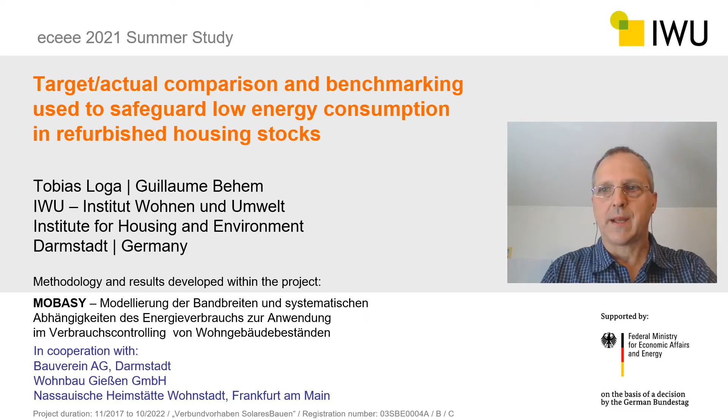So what are the challenges we are facing? Half of the 40 million homes in Germany are in multifamily houses, about a third of which is owned by housing companies. Most of these multifamily houses are heated by central heating systems operated by the housing companies. So when the housing companies get the energy bill, they just forward the bills to the tenants, who are of course supposed to pay them regardless of the energy standard of the building. It's just a transit item for the housing companies.

However, many housing companies put a lot of effort into energy refurbishment, driven by the challenges of the climate crisis and to improve living conditions for their tenants. However, most of them do not systematically track the applied measures and the energy savings. So the idea of the MOBASY project is to develop a concept for target-actual comparison and benchmarking, and to apply the concept in cooperation with housing companies.

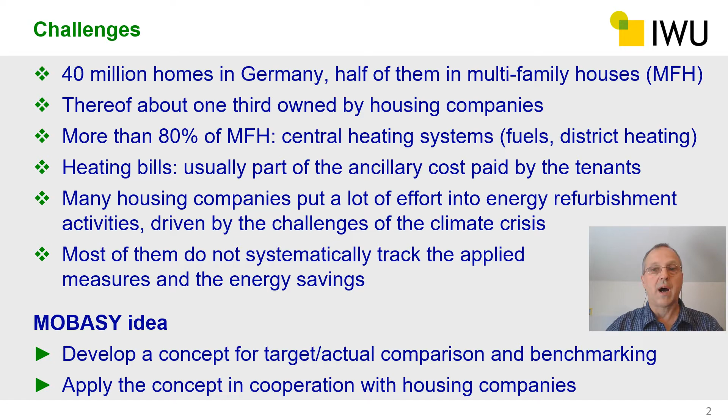The idea is to attach to processes which are already running in the housing companies and to just add elements which are able to collect and store information about the energy performance of the buildings.

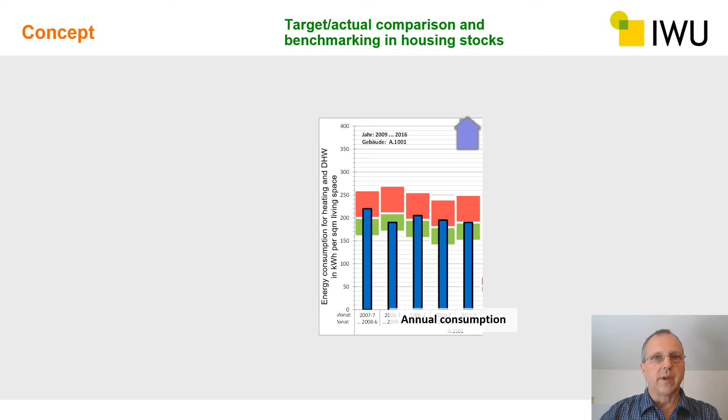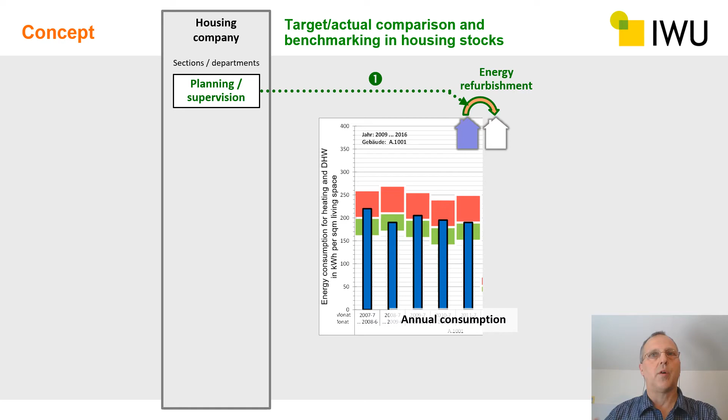So if we take an example building which is not yet refurbished, with an annual energy consumption of about 200 kilowatt hours per square meter per year, the housing company decides to make an energy refurbishment. The planning is carried out by the housing company itself or by commissioned architects or civil engineers. The new element is that we store specific information about the energy performance of the building—about the theoretical energy performance, about the thermal envelope, about the heating system—in a monitoring database. This enables us to determine the expectation range for the energy consumption.

Now the refurbishment has taken place, the energy consumption is on a new level, and the heat billing is performed as in the years before—this is as usual. Now the new element is that we store the information about the annual energy consumption also in the monitoring database and assign it to the information about the energy state of the building.

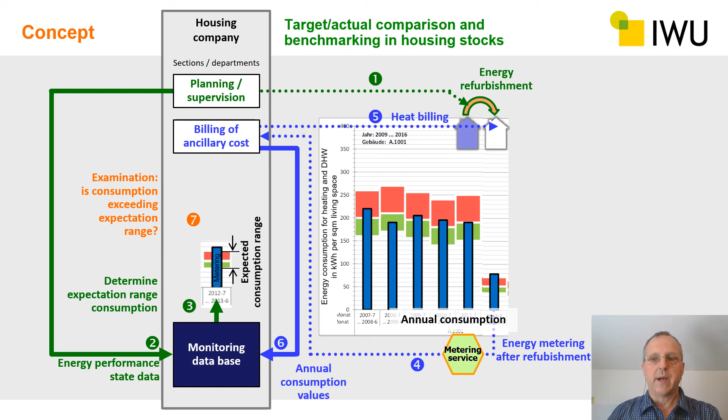So now we can compare the metering with the expected range of energy consumption. Usually there will be no problem and it will fit, but in some cases there may be an exceedance. In these cases we can have a closer look at the operating conditions of the building, maybe also at the user behavior. So we don't have to do this for all the buildings, but only for those where an exceedance has been found.

And of course we can continue this process, because the information is stored about the state of the building. We can continue this process in the building stock and also extend it to other buildings which are refurbished.

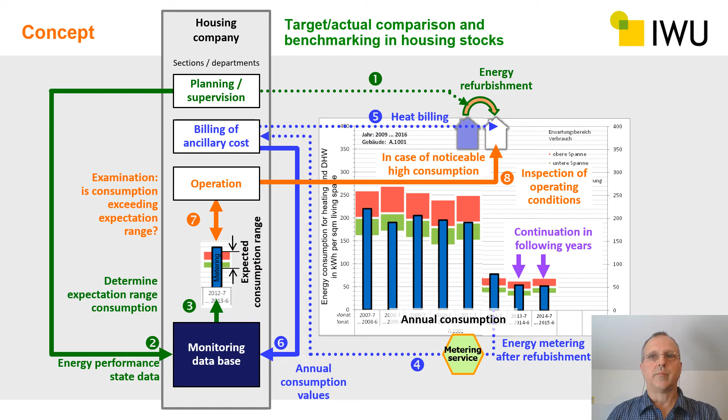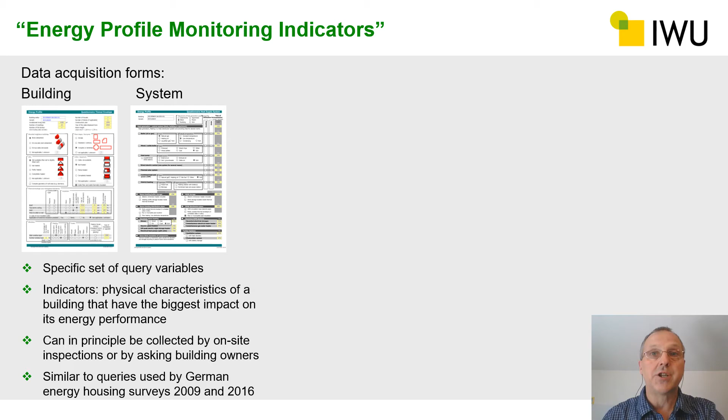For the collection of information about the energy performance characteristics of the buildings, energy profile monitoring indicators are used, which are a specific set of query variables and indicators on the physical characteristics of a building that have the biggest impact on its energy performance. These indicators can in principle be collected by on-site inspections or by asking building owners, and that's also the reason why these indicators have been used in German energy housing surveys in the years 2009 and 2016.

Let's get a closer look at the form for the building. At the top we have general information: living space, number of stories. Then we get information about the number of attached buildings, geometrical information, and the state of the heating situation in the attic and in the basement. We also get information about insulation upgrade, thickness of insulation, area fraction, year of installation, and about the window types—the number of panes, low-e coating information, frames, and year of installation of the windows.

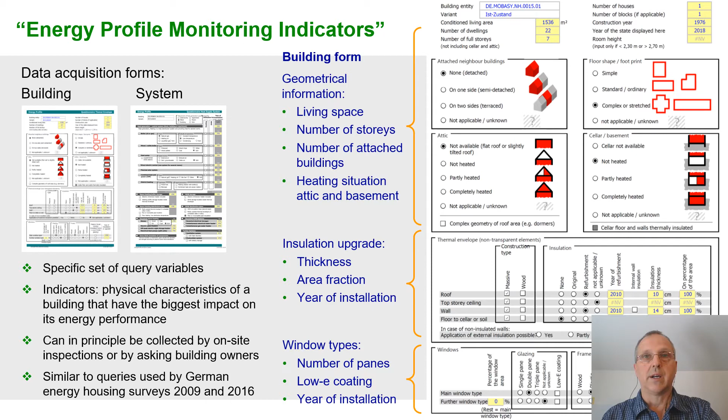Now that we have gathered the energy profile indicators for all the buildings in the database, a transformation is done to input variables for a physical model. The input variables consist of calculation values and an uncertainty range. Since we are dealing with existing buildings, not all information is available, so we make a treatment of missing information. In these cases where something is missing, we use averages valid for the total building stock, and at the same time we increase the uncertainty, the typical range of this variable.

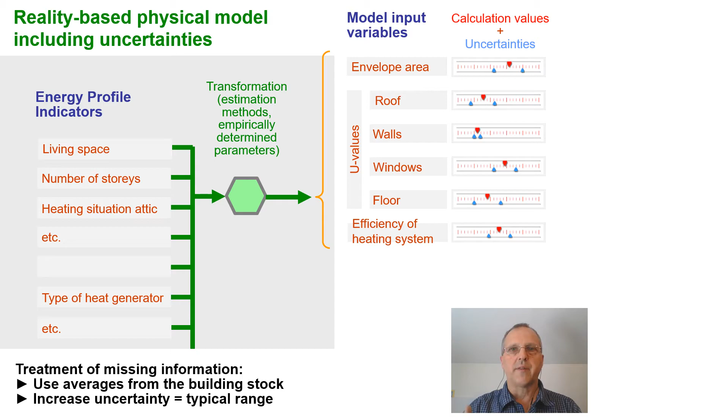This is also done for the boundary conditions. Here too we have calculation values and an uncertainty range for the user behavior and for the climatic data. Now we can perform an energy balance calculation with a physical model and get one value for the energy use of the building. We do a second calculation where we take all these uncertainties of the input parameters and calculate the resulting uncertainty of the energy use. So we get a value for the energy use and we get an uncertainty of this value from our calculation.

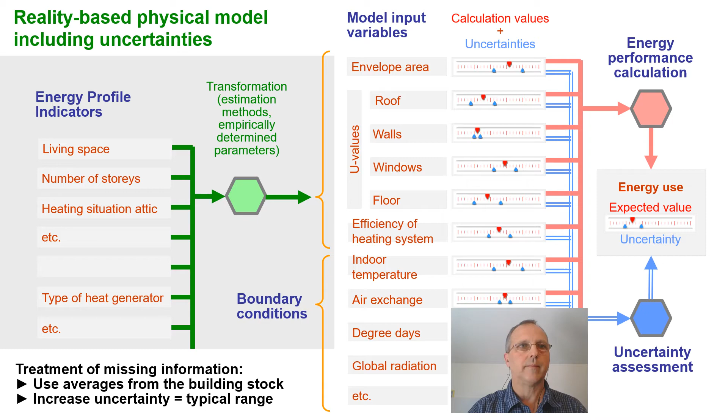Now we are coming to the implementation of the concept.

As mentioned earlier, we are cooperating with three housing companies, and they have provided data of buildings in three groups: refurbished buildings ABC, and one group, Group D, with buildings which are not yet refurbished. So we have got 155 building data sets of building entities, which are mostly apartment blocks, 165 apartment blocks, consisting of more than 3,000 dwellings.

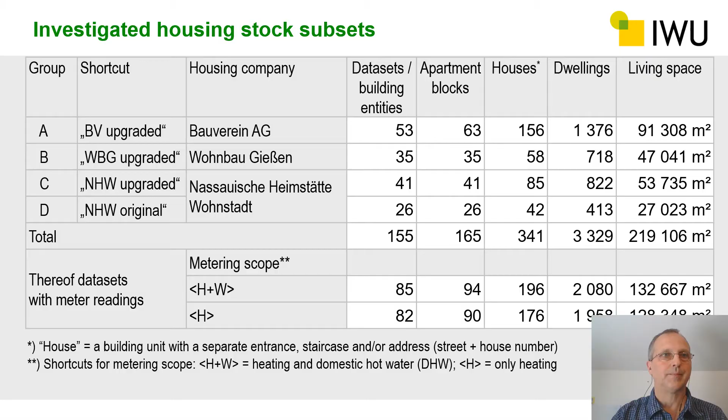Now we have calculated for all the buildings in the database the energy use and can compare it with the meter reading. On the left side, you see a chart where all these values are included. You see here the orange bars, which are meter readings, and the blue bars, which are the calculated energy use, along with the uncertainty of the calculated energy use.

Now we can compare the meter reading with this uncertainty range. These values are sorted according to the ratio of calculated energy consumption and meter reading. At the top, you see buildings where we have a lower energy consumption than the expectation range. At the bottom, you see buildings where the measured energy consumption exceeds the expectation range calculated.

We see that for most of the buildings here, the energy consumption lies within this expectation range, but for some it does not. The idea of the project is now to have a closer look at these buildings, because maybe there is something wrong.

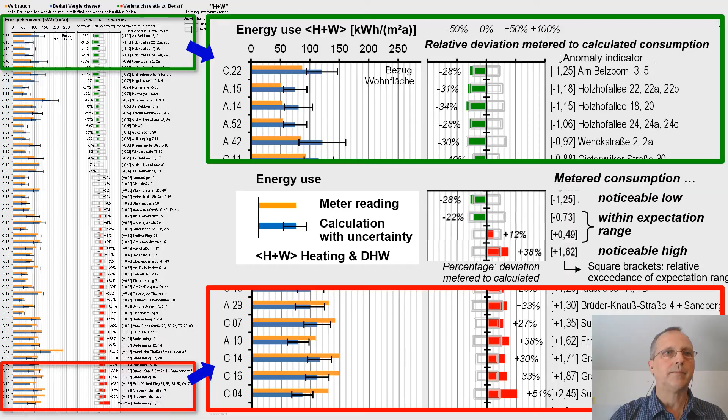So now we can have a closer look at the buildings with suspiciously high or suspiciously low energy consumption. The first steps are to check the building data and the heat billing data, and maybe correct the data in the database. The next step is an on-site inspection of the thermal properties of the building fabric and the heat supply system. The further step is to examine the operating conditions and the user behavior.

In the project, we have already done step 1 and step 2, and could correct some of the input data to improve the data quality. The next step will be to make these on-site inspections and try to find out why actual energy consumption is higher than expected, or lower than expected.

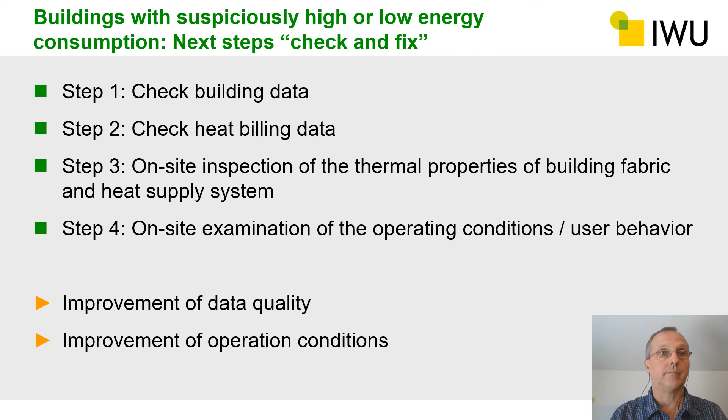Now we can have a look at the coherence of the reality-based physical model and actual consumption. So we make a scatter plot, metered energy consumption by calculated energy use. For example, if we take one point here, we got an energy use calculated of 103 kilowatt hours per square meter and year, and we got a metering of 95 kilowatt hours per square meter and year.

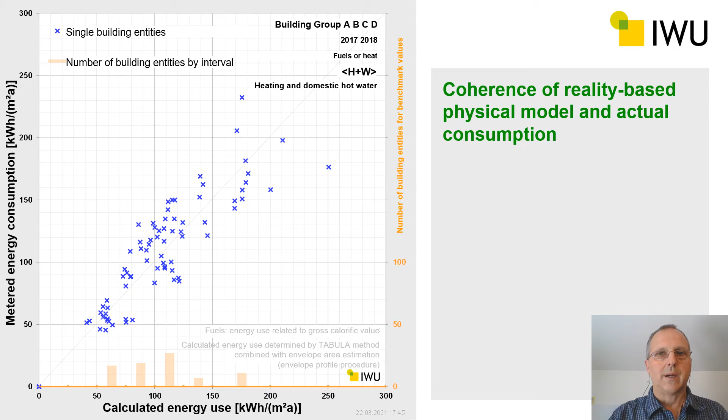We now divide the calculated energy use into intervals and have a closer look at these intervals. First of all, we see the number of buildings which are included in the interval, and now we have calculated the average energy consumption for each interval. In this case, we have an average energy consumption of 112 kilowatt hours per square meter and year.

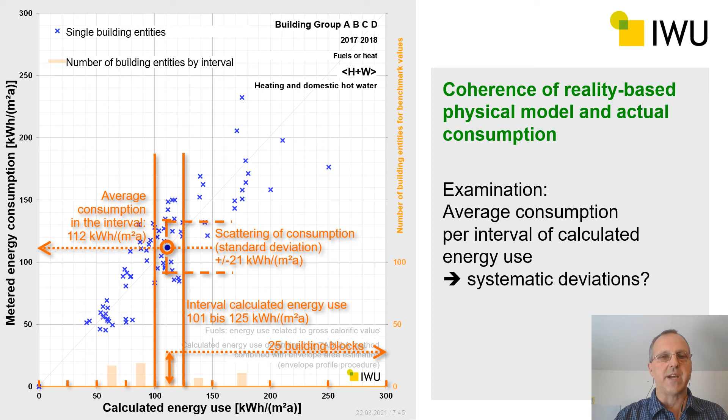And we can also determine the scattering of the consumption, the standard deviation, which is 21 kilowatt hours per square meter and year. This has been repeated for all intervals of the calculated energy use, and so now we get averages of the energy consumption for each interval.

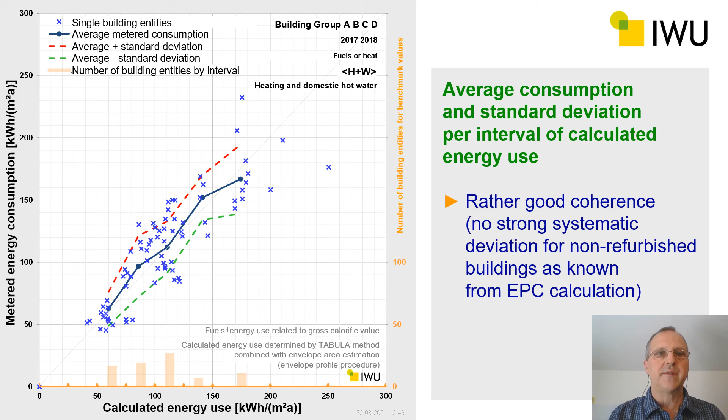The results are encouraging. As you see, the values are very close to the bisecting line, so there is no strong systematic deviation between the metered energy consumption and the calculated energy use. This is in contrast to findings where an energy performance certificate calculation has been used, where we find curves that deviate more, so the values for the calculated energy use are much higher for unrefurbished buildings than the metered energy consumption.

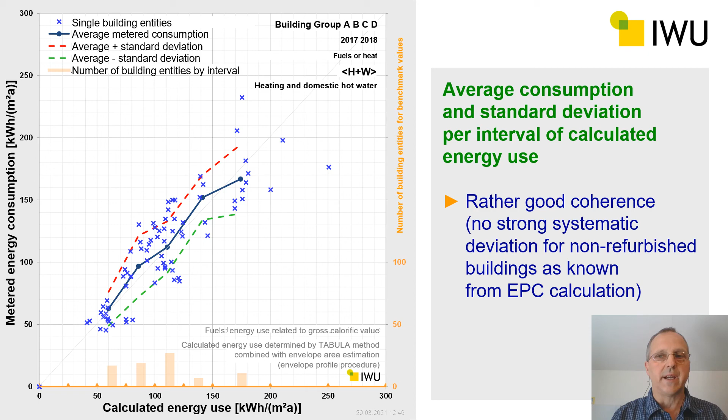I'm getting to the resume now. We have developed a method for target actual comparison and benchmarking in housing companies, which consists of a monitoring table, including energy profile indicators. We've developed a reality-based physical model where we retrieve missing information and assign uncertainties.

We have applied it to a collection of datasets of about 150 apartment blocks and found that the physical model is rather reliable. We have identified buildings with a suspiciously high energy consumption or a suspiciously low energy consumption, and found, by checking the data, some errors which we corrected.

Now this is a better match, but there are still some buildings where the energy consumption is higher than the expectation range. And here we want to go to the buildings, make on-site inspections, and try to improve the operating conditions in the buildings.

The perspectives are that we try, of course, to extend the database to more buildings, maybe to the whole stocks of the building companies, and to try to reach a continuation on an annual basis of the target actual comparison. That could be part of an energy management in the housing companies.

The challenge is, of course, that additional staff would be necessary, and that costs money. However, it could be a contribution to a strategic portfolio management towards carbon neutral housing stocks, including annual determination of annual refurbishment rates and tracking the actual greenhouse gas emission reduction on the way to the carbon neutral housing stock.